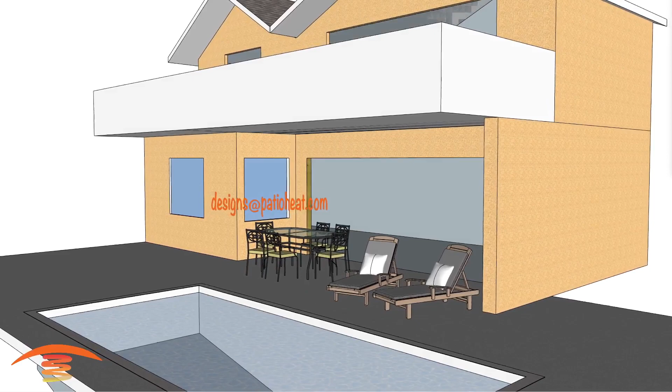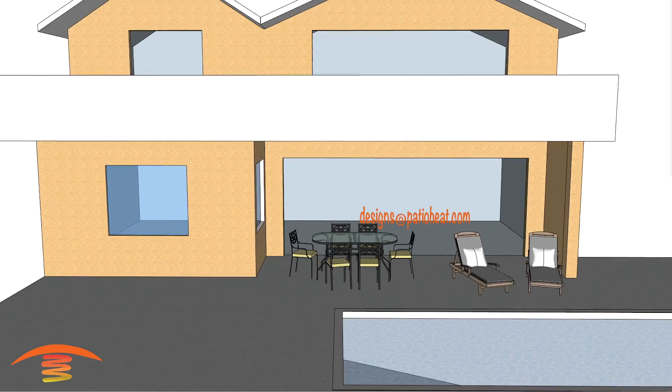Now let's get heating. All right, so here we have the residential application where they have a covered patio deck area and also a balcony space up here. Let's go ahead and look at the overall dimensions.

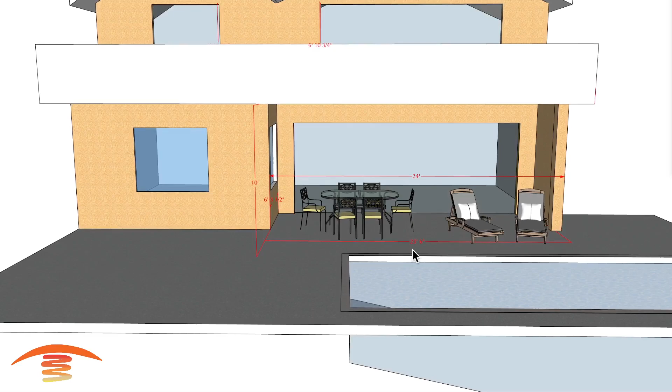Overall dimensions on this lower space, I have about 24 feet distance from left to right. I put a wall over here, I'm not quite sure if this wall is here or not, but in any case I have it at 23 feet 6 inches. The ceiling height I have at 10 feet off the finished floor, and this section right here I have at 6'3", though I'm not quite sure if that's true.

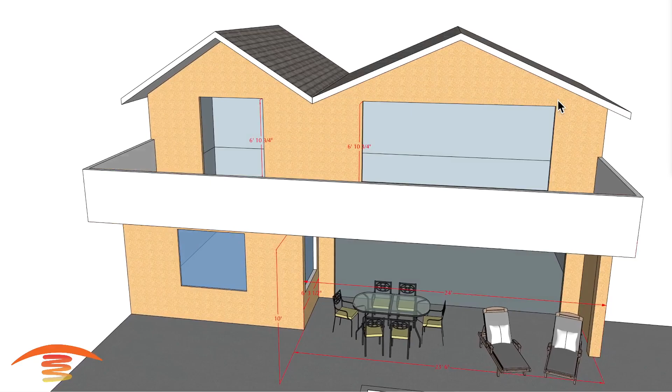Up here I have a height of the doorways, sliding doorways, and I'm assuming this is also a sliding doorway down here at the bottom. I have this at 6 feet 10, and as far as the height's concerned, 6 feet 10 and 3/4. It might be just slightly higher, I'm not quite sure.

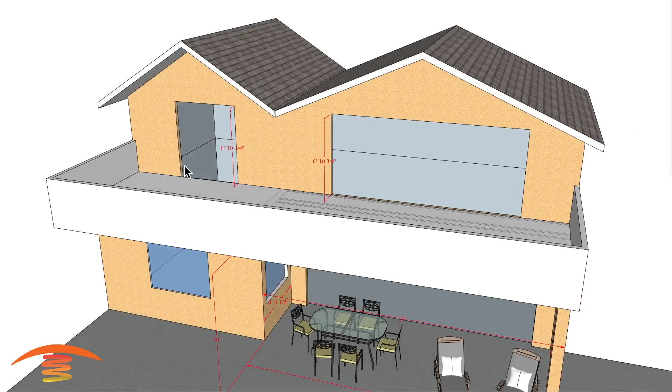I should also mark in the distances here. So the distance I have for this space is 16 feet, and for this space I believe it was around 6 feet. I'm not quite sure if that's going to be true, but that shouldn't matter as long as these are sliding doors.

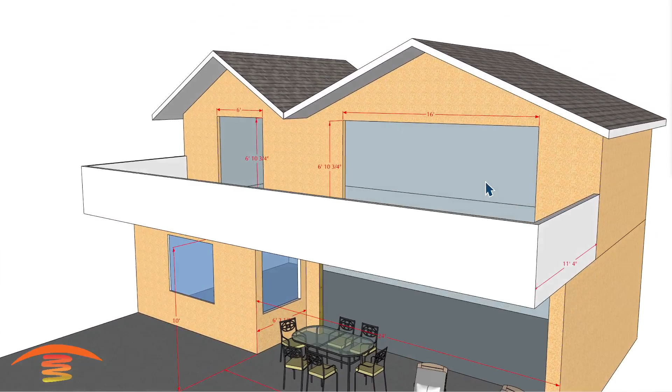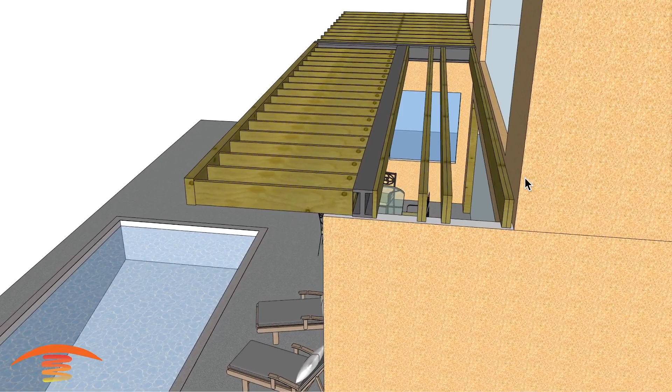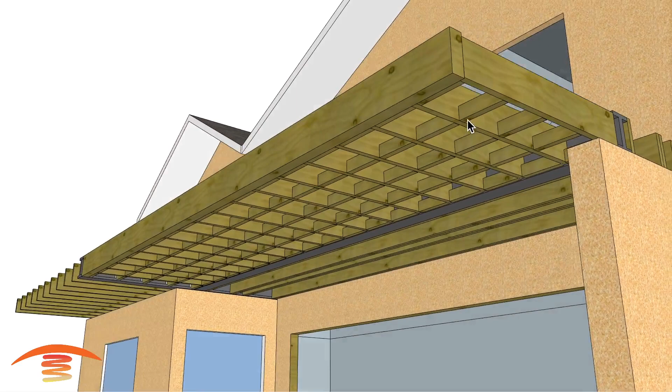That's pretty much about it, so let's go ahead and look at a couple of the options. Now I'm going to turn off these dimensions and remove the structure over here, and just show you some of the things I saw in the images. Not quite sure if I'm matching this all up properly, but there's a metal I-beam that comes across here, it looked like, and possibly one over here, and then this is all wood structure, ceiling joists, with some spacers between each one.

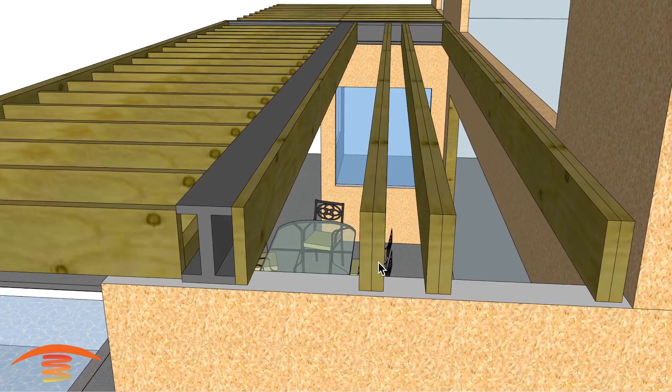I'm not quite sure if that was true or not. I have these at 16-inch center to center on each one. These ceiling rafters, I have at double 2x8s or something of that nature, maybe 2x10s. But in any case, as long as they're at least 8 inches tall, that's going to be fine, and that's true with this over here.

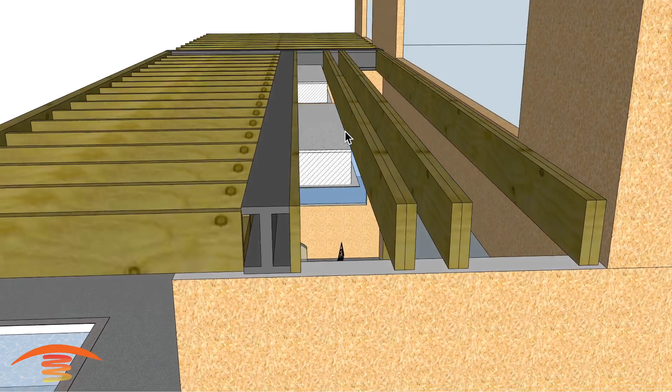So what they had shown me in the image is they really wanted to have a couple of heaters placed, and I'll put those here. They wanted to have a couple of heaters placed in this location like that. Now I would say this would work.

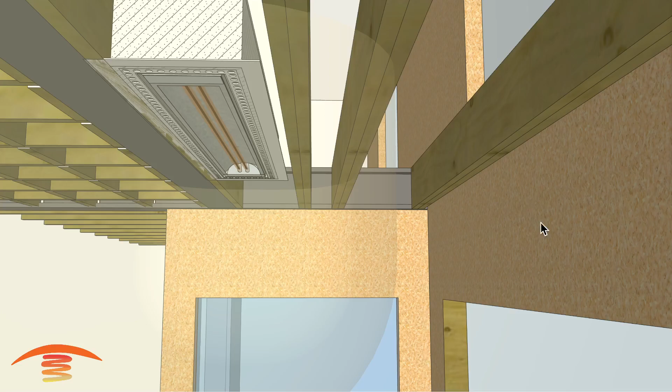However, we would need to just confirm that the clearances below are met. You need a minimum of 18 inches from this edge of the heater all the way to the right of where this door is going to be, or wall we might call it, and that would be fine as long as that is true, that we are meeting those clearances.

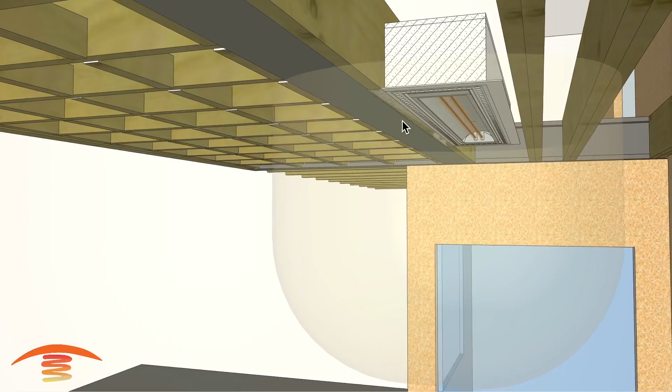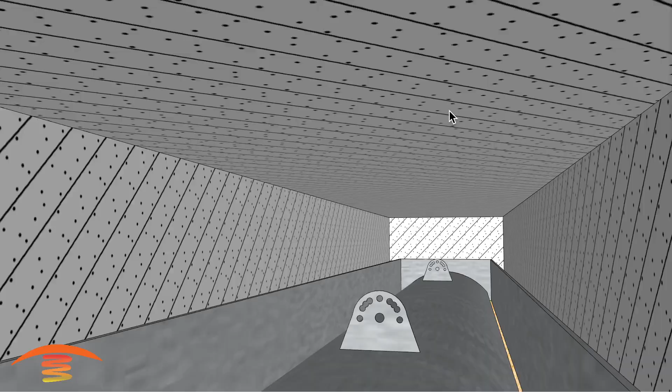So there's 18 inches of clearance on all four sides of the heater below it, as well as 36 inches down, and then you would put in the flush mount kit. I would put a 6,000 watt unit at an installation height of this height, and then you would also need to put in a 1-hour rated firewall that would surround the enclosure of the flush mount kit itself. So this would be the 1-hour fire rated drywall, this would be the flush mount kit itself, and then the heater inside of that kit. As long as we're meeting those clearances, everything looks fine.

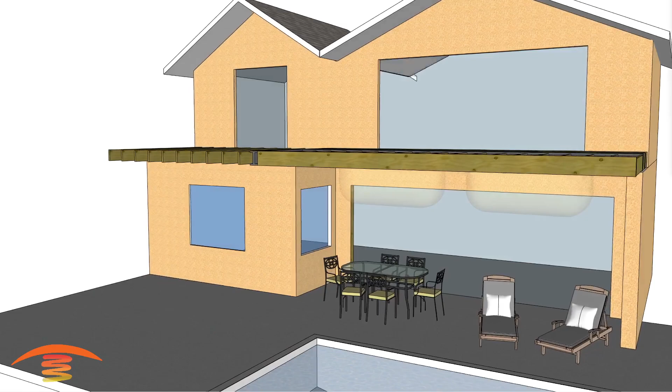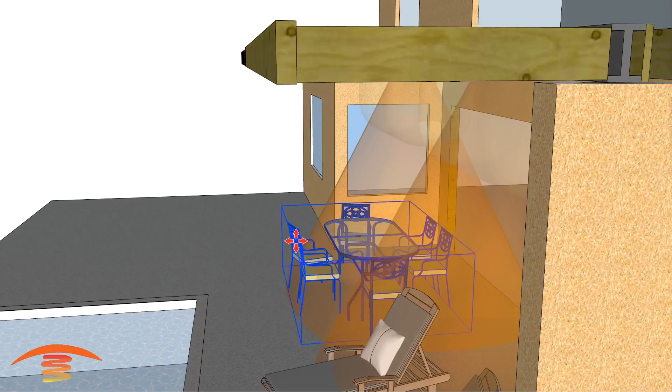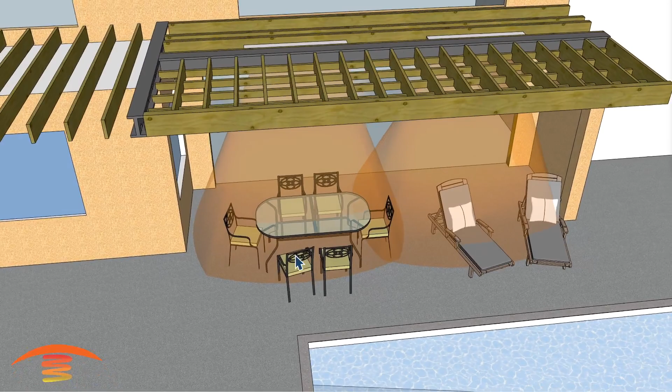The only thing I would probably want to verify is the footprint of heat. Is that footprint of heat going to be something they're going to really appreciate? Now I have a dining table here and some reclining chairs over here. If this dining table is going to be further out, in this location, then yes, it's under the covered area space, but you can see that these spaces will not be heated at all with regards to the heaters placed in this position.

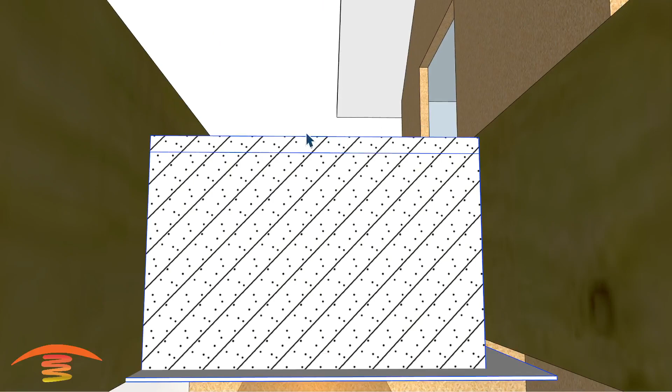Let's go and I'm going to turn on one other thing here. Well, let's just go and mark this real quick. I'm going to mark the fact that I have the center of the heater from the wall. I want to make sure that we have that correctly here. So I have that from that edge to the wall itself.

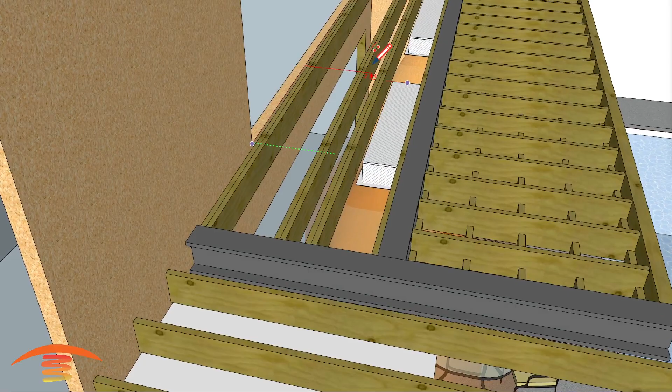I have that at, let's see if I can get this proper. And we'll try it this way. Sorry for the delay here. Yeah, still, there we go. All right, so I have it at roughly about 3.5, well, 3 feet 11 inches. Let's see if we can do actually a better... correct. Yeah, so 3 feet 11 and 1/4 inch would be the true dimension that I have, and as long as you meet that, then that's what you are going to receive as far as the footprint of heat is concerned.

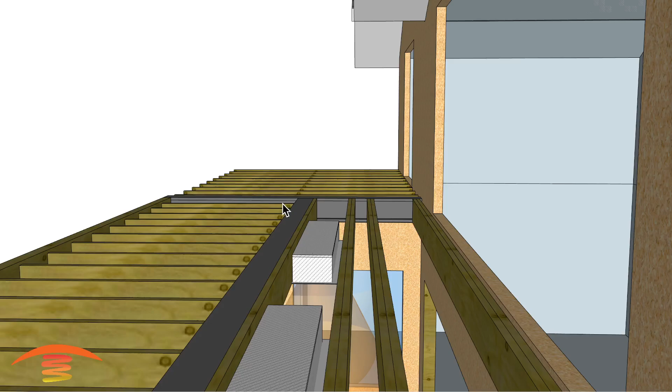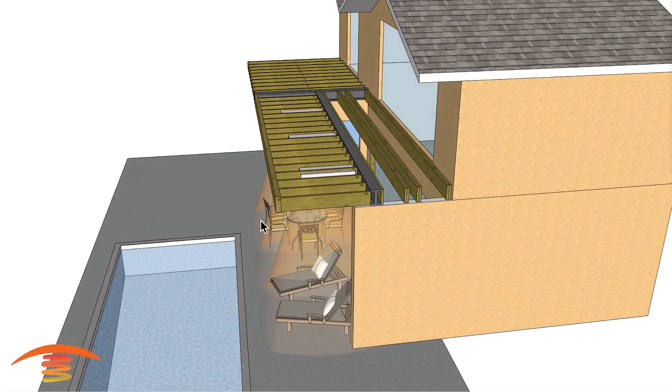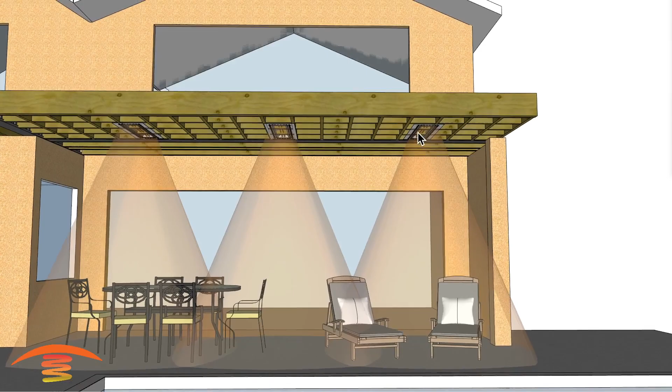Now, what would I recommend in this location if this is even available to do? I would probably want to put in different flush mount units, probably the 5,000 watt units, and you can see here the footprint of heat is further out in the patio space. I have one in the center, and each one is roughly about 8 foot center to center on each other.

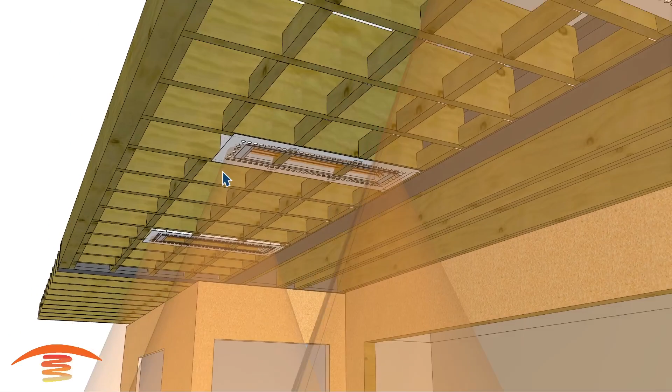That might have to differ based on whether these can actually be removed. So could you physically move one of these spacers between the joists? Can you remove all 4, or all 3 rather, and can you actually place this unit here? This would be my preferred application for this setup.

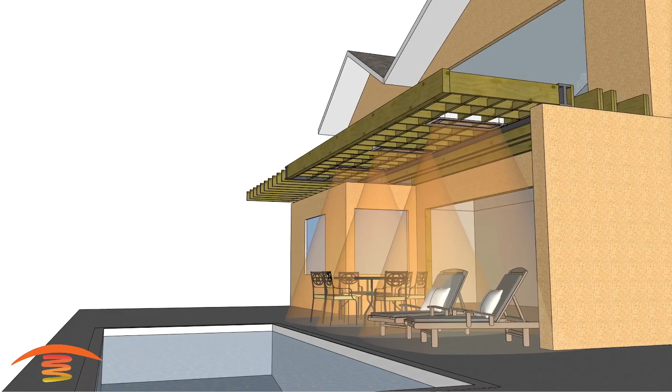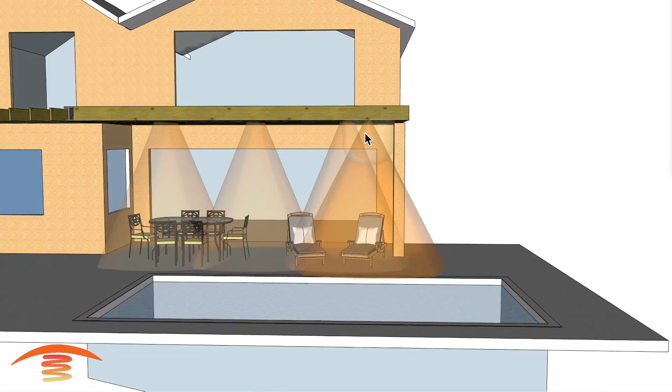So I think that's pretty much about it for this lower section. The last thing I was going to say is, if it's available to place a 6,000 watt unit here, I would do that, but it looks like from the dimensions I could interpret that this probably wouldn't fit. But if you could fit a 6,000 watt unit in here, I would place it in place of these 3 5,000 watt units, and that gives you a much nicer footprint of heat throughout the whole span. So that's how I'd heat up the lower section. We're going to keep it at the 5,000 watt as my preferred choice.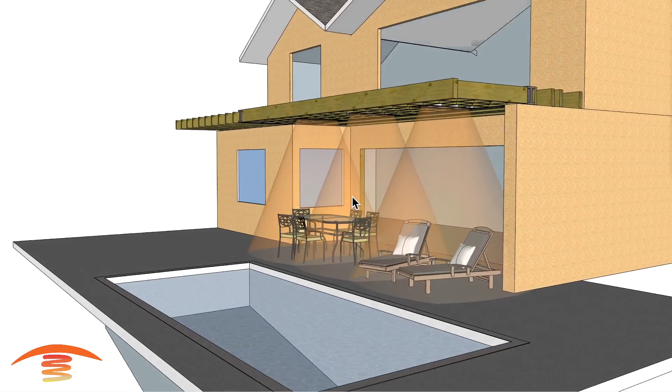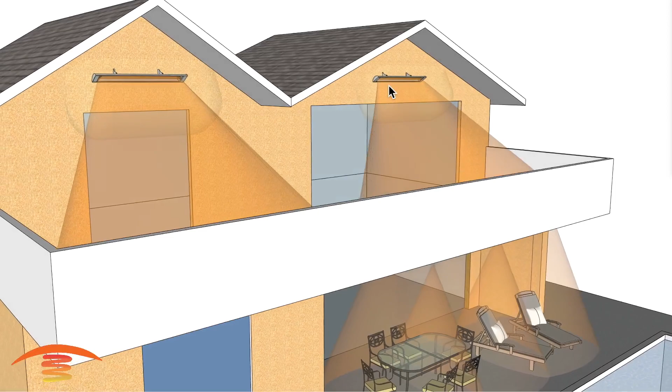Let's go ahead and look at what we might do up here. Let's turn this back on. What I would do up here is one of two things: you could either do the 6,000 watt CD series, or you could possibly do a couple of the 5,000 watt units over here and a 6,000 over here.

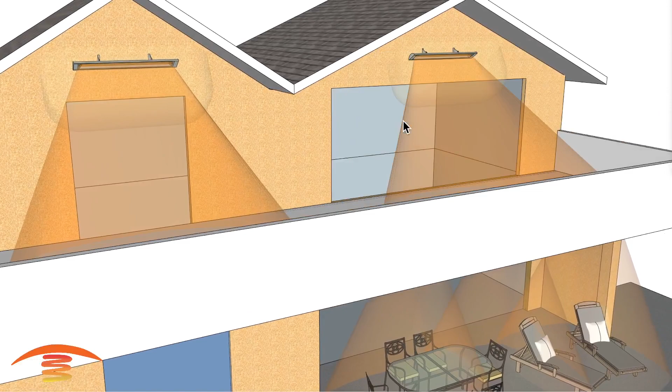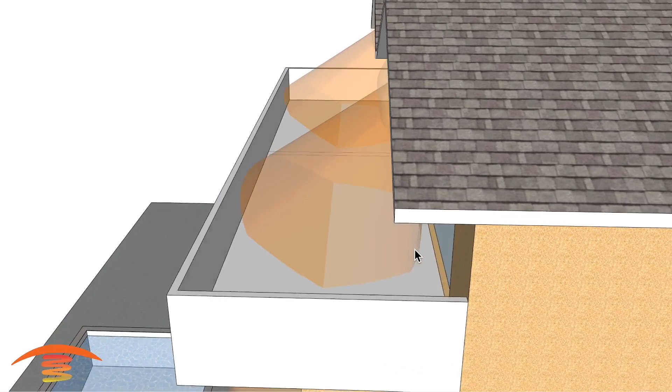Let's go ahead and look at the footprints of heat for the 6,000 watt units. I'm assuming this isn't going to be a heavily occupied space, so maybe the 6,000 watt unit would be fine here. You're going to get about a 12 foot throw left to right, and roughly from this edge out you'll feel warm as long as you're within this 8 foot section. Out here you're not going to feel so much warmth.

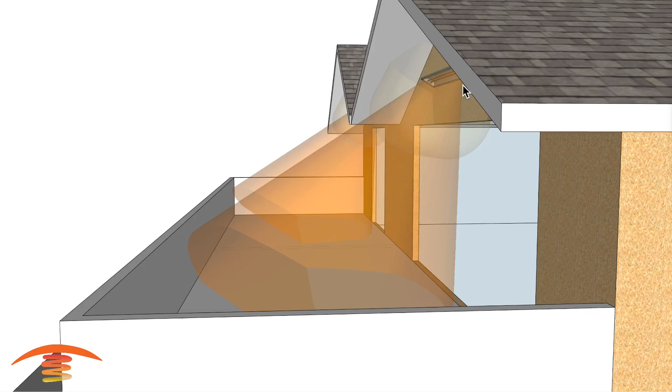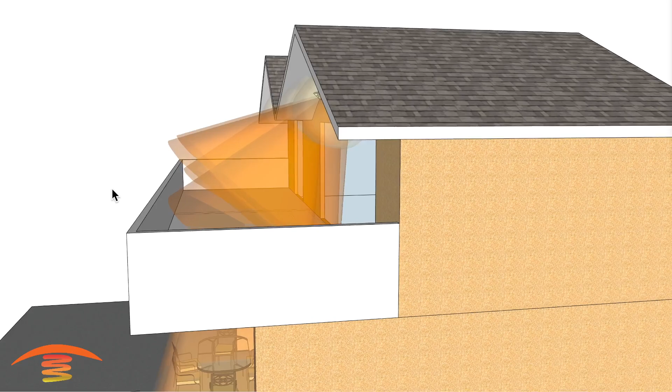But one other thing I want to show too, on the 5,000 watt units, you can see that the angles are slightly different. On the 6,000 I have it at 30 degrees, and on the 5,000 watts I have it at a 40 degree angle. So you can see the footprint goes a little further out at that angle, but it doesn't hit close to this edge like the 30 degree angle of the 6,000 does here.

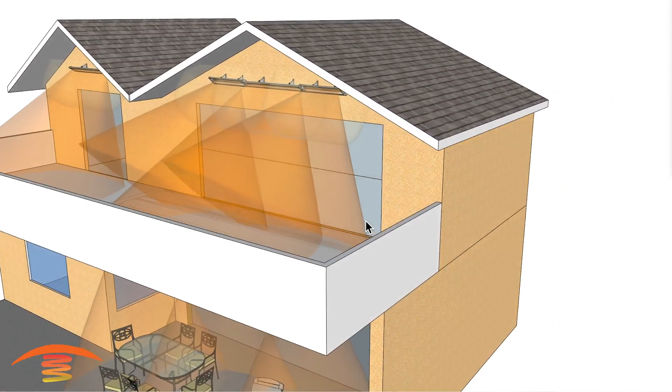So I'm kind of thinking the 40 degree would be better, but I don't think you're going to be occupying the space right by the doorway. In any case, I just want to show there are 2 different ways of actually angling the heater. But again, 12 foot this direction, 8 foot away from the wall, is the most warmth you're going to feel with a heater mounted.

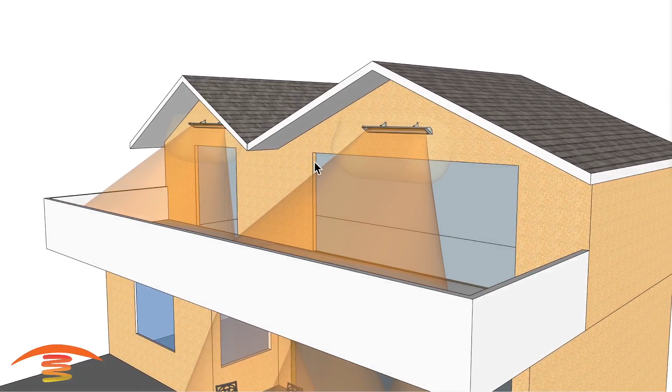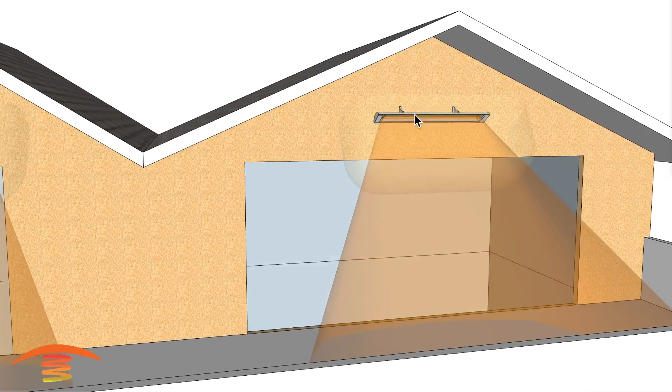I have it at 18 inches above that actual dimension I showed a minute ago, which was the 6 foot 10 3/4 inch, so I have it 18 inches higher than that. As long as we're meeting the clearances above the heater, which on a vertical surface needs to be at least 12 inches from the top of the heater to any combustible above, you'll be fine. I'm assuming that's going to be true up here as well - 12 inches above and you're fine.

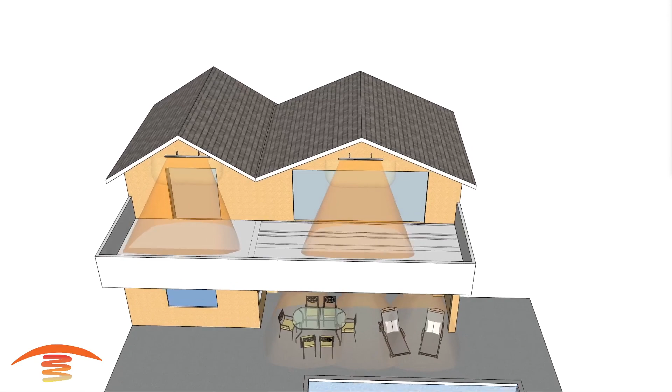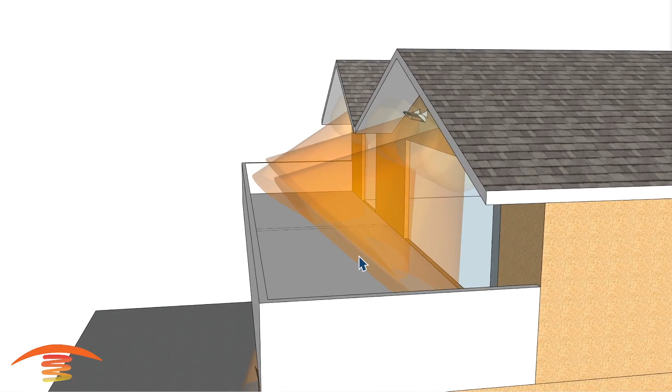So let's go ahead, and I'm going to turn on the two 5000s, and take this off just so you can see what that footprint would look like. The intensity should be fine as far as distance is concerned. I have this marked out at about 8 feet, from the heater edge to the center of the footprint of heat, and this I have at 10 feet. So two 5,000 watt units versus one 6,000 watt unit would be fine for this application as well.

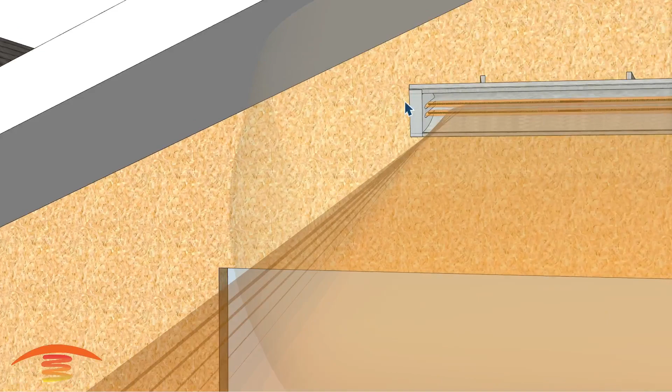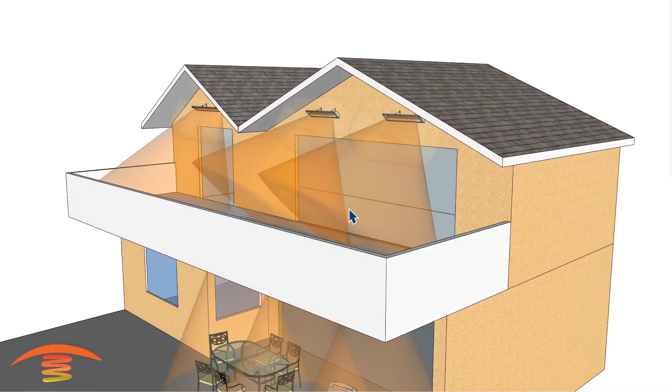But again, 8 foot out is the most comfort zone area you're going to feel with the heater mounted on a vertical surface like this. We also want to make sure we have 12 inches of clearance above the heater. I'm not quite sure that's actually going to be met with the two 5000s - you might have to move them a little closer or down slightly. But yeah, I like this application here. This is probably my preferred application, using the 3 5s, 2 5s, and one 6,000 watt unit like that.